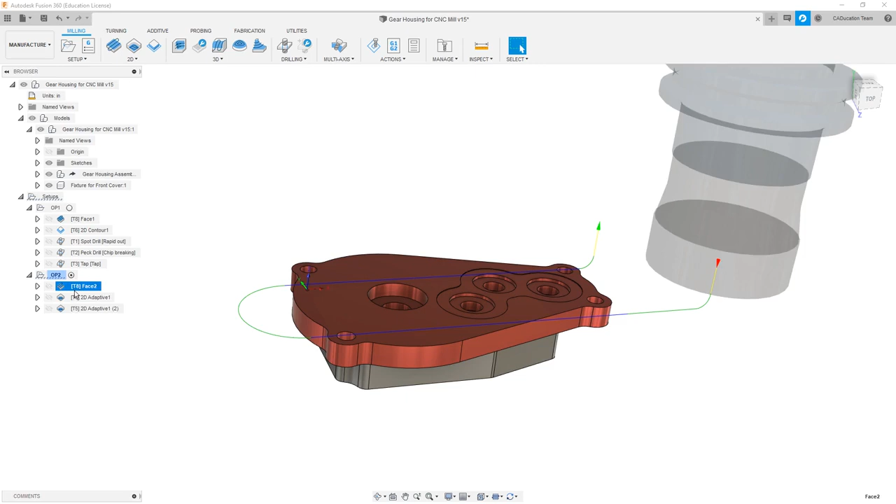This creates our facing operation, and I'm going to bring this up to the top, so we can simply hold with the left mouse button and drag it up. If it doesn't let you, you might need to drag some of the previous operations below it, because there are certain instances where it has trouble dragging all the way to the top. So just make sure that you put the facing operation first, then our 2D adaptive, which is cutting the outside of the part, and then the 2D adaptive, which is starting to remove the material on the inside of the part.

Now remember, we left stock everywhere, and right now we have a 1/4" end mill. When we're talking about creating operations, we want to keep in mind the tool that we're using, and we want to minimize those tool changes. So the first thing that I want to do is use measure, and I want to inspect the size of this bore. The diameter is 0.827, so the 1/2" bit can get in there and cut some of that geometry.

If I measure the radius on this large section here, we can see that this is also large enough for me to get that 1/2" in there. This one here is getting kind of close, but the 1/2" can still go in and cut that geometry. And the small one here, this is going to be too small to get a 1/2" tool in, but the 1/4" can go in and finish those and finish this section here. We can also take the 1/4" in to finish off these holes. Since our tool library only contains a 0.201 drill, we can pre-drill and then use a 1/4" end mill to finish off those holes.

So keeping this in mind, note that we've used our face mill, then we've used a 1/2" end mill and a 1/4" end mill. I want to carry on using the 1/2" end mill, so I'm going to create some new toolpaths and then make sure that they sit directly after this to minimize our tool changes. So we're going to select 2D contour. We're going to make sure that our tool is our 1/2" end mill, which is tool number 6.

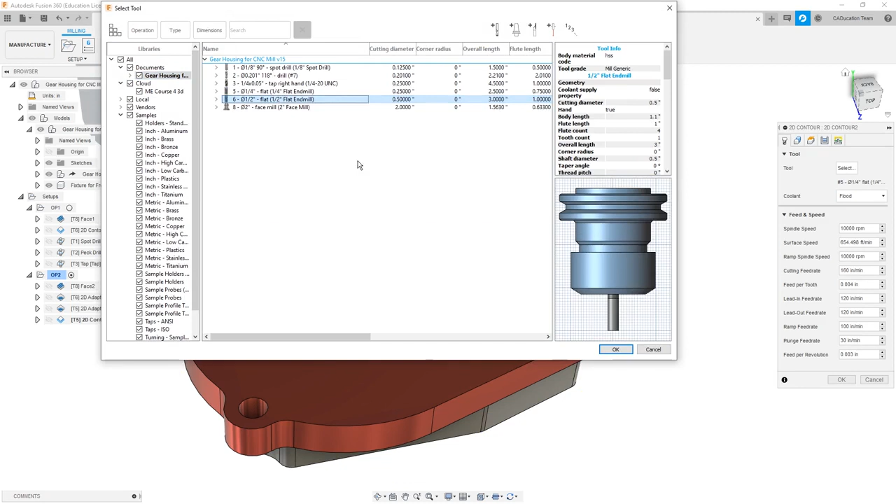And then for our geometry, I'm going to select the bottom edge here. I'm not going to leave any material behind. I want to make sure that everything gets cut all the way down to the geometry or the size that we need. For the height, I want to make sure that it goes to the selected contour, but I also want to offset it a small amount. Oftentimes, if you go directly down to that edge, you might find that you leave small remnants or the corner isn't quite sharp. So in this case, we're going to go down to -0.06.

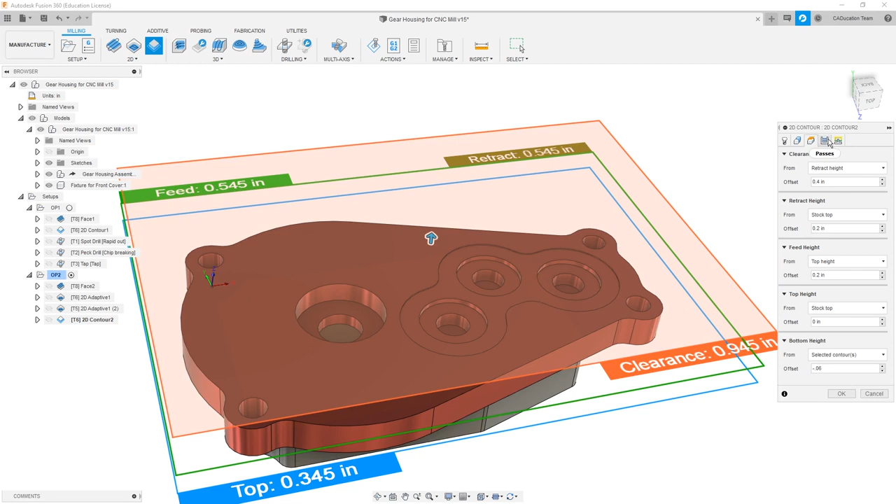For the passes, there'll be no stock to leave. We're not doing multiple depths. We can repeat the finish pass if we want, but in this case, we're going to do a single finish pass, and we're going to say OK. The last thing that we need to check is we need to make sure that our 1/2" end mill can actually cut into these areas.

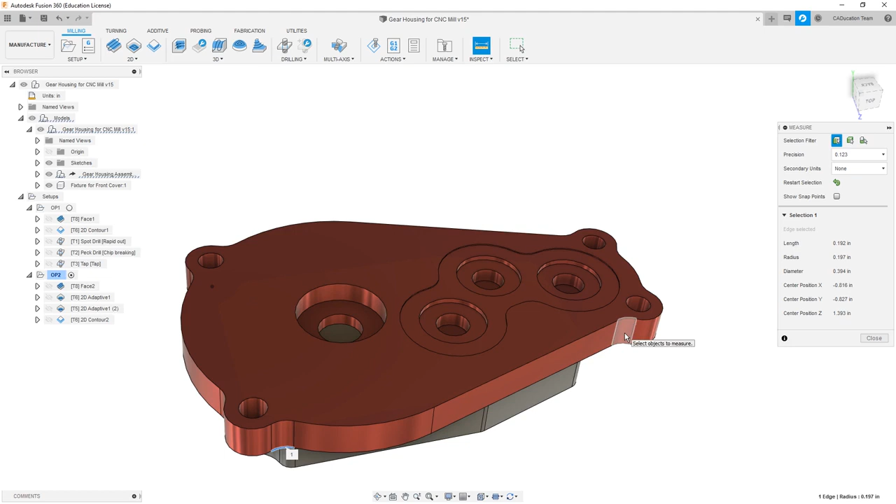You'll note that the diameter here is 0.394. This means that these corners are not getting removed. It's actually leaving material there, and unfortunately, that's not something that we want to do, because those fillets, that geometry, matches another part of the design. So I first want to drag this up, and I want to place it after that 2D adaptive to make sure that I'm minimizing my tool changes.

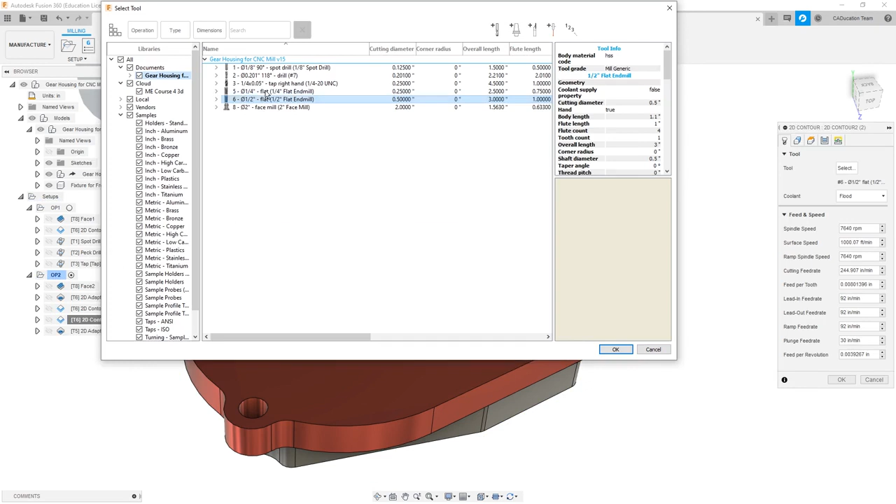The next thing that I'm going to do is I'm going to duplicate this. If I select duplicate, it automatically puts it directly after, so I don't need to worry about moving it. But now I can go in and make some modifications. I'm going to change this to use my 1/4" flat, and then in the geometry section, I'm going to use rest machining. In rest machining, I am going to say that the tool that came through here previously was a 1/2" tool.

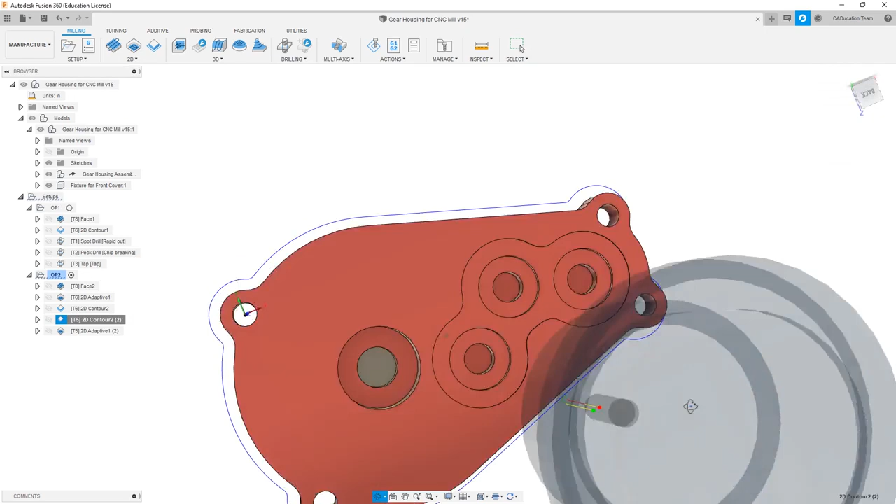All the rest of the settings will be fine. We're only looking at finish passes. We're going down to the same depth. And now we're doing that finish cut with the 1/4". But notice that the 1/4" is going around the entire model. We want it to just focus on those fillets, the areas that were left behind.

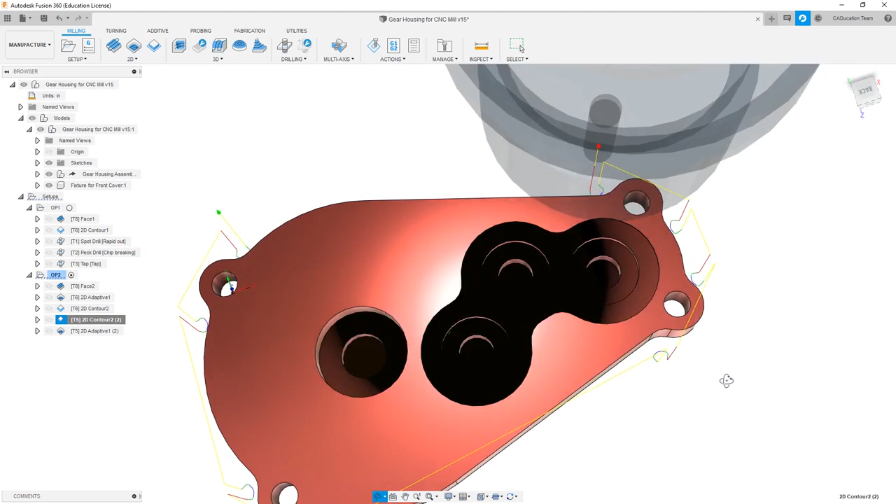If we come back in and we modify our rest machining properties, if we make this radius larger than what we're working with in terms of our tool, you'll see that it does a full contour. However, if we make it smaller, take it all the way down to 0, and let the toolpath calculate, you can see that it's coming back and it's cutting the geometry that's left behind in those corners.

So this is going to have a lot of rapid movements, but it's going to minimize the amount of time the tool spends cutting, as the 1/2" tool can cut thicker, can cut all that material and cut it a lot quicker than the 1/4" bit could.

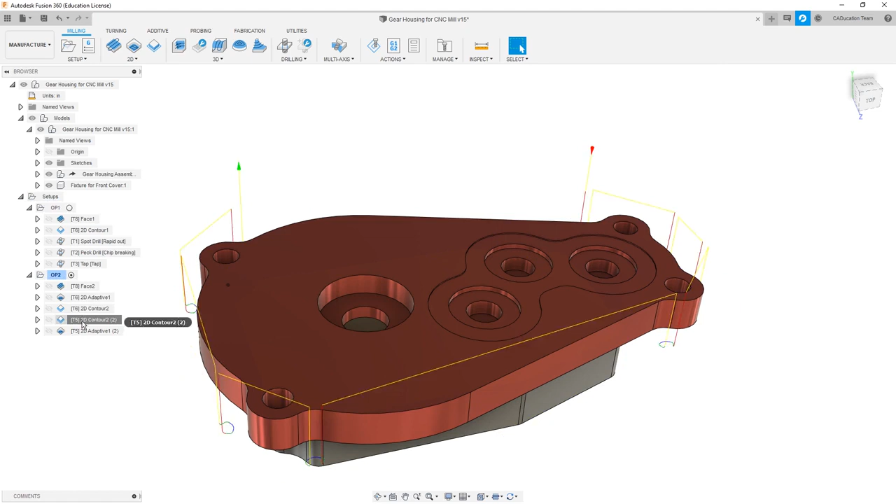Now that we have effectively gone from our 1/2" tool down to our 1/4" tool, let's move our way inward. The next thing that I want to do is take that 2D contour toolpath with the 1/4" flat, and I want to start cutting different geometry. I want to finish off this as well as this inside section here, and I'm going to focus just on these first.

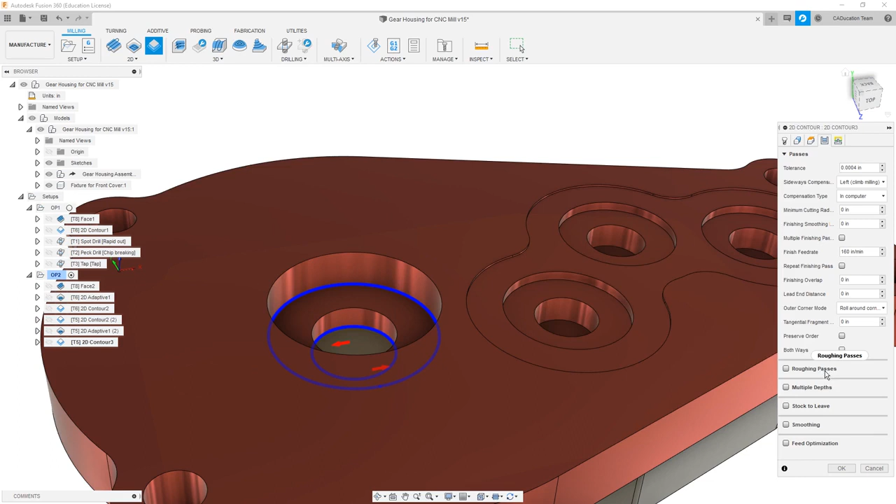The cut depth is going to be based on the contour. The passes are not going to contain any roughing passes, they're only going to be finishing passes, and the linking parameters we'll leave as default. So we're going to allow it to come in and clean those out, and then come into this bottom one and clean it out. However, the bottom one never had a tool drop into it. So simply coming in and doing a finish contour in that area isn't quite going to work.

In order to fix that, we need to come back in with a pocket toolpath or a 2D adaptive clearing toolpath. Using that same 1/4" end mill, we're going to allow it to do a 2D adaptive, leaving some material behind, but notice that it comes back and it tells us there's a warning. There's not enough material there, or there's not enough room there. If we review the warning, it tells us that it's an empty toolpath.

If we do a little bit of investigation and we measure this, we can see that the diameter is 0.413, so there's plenty of room for the tool to get in there. However, if we look at some of the linking parameters, the linking parameters may be too big to allow the tool to get into those areas. So I'm going to make them a little bit smaller. I'm going to make them 0.02, and we're going to allow it to do the helical entry.

If we come back, we can turn down the stock to leave. We can set this to 0.01, make it a little bit smaller, and see if it can actually get in there and clear that material out. It's still having problems with that, so another solution is to use a smaller tool or to keep manipulating those parameters. Using a smaller tool defeats the purpose. So the way that I want to approach this is to remove this adaptive clearing toolpath. So we're going to select it and go to delete.

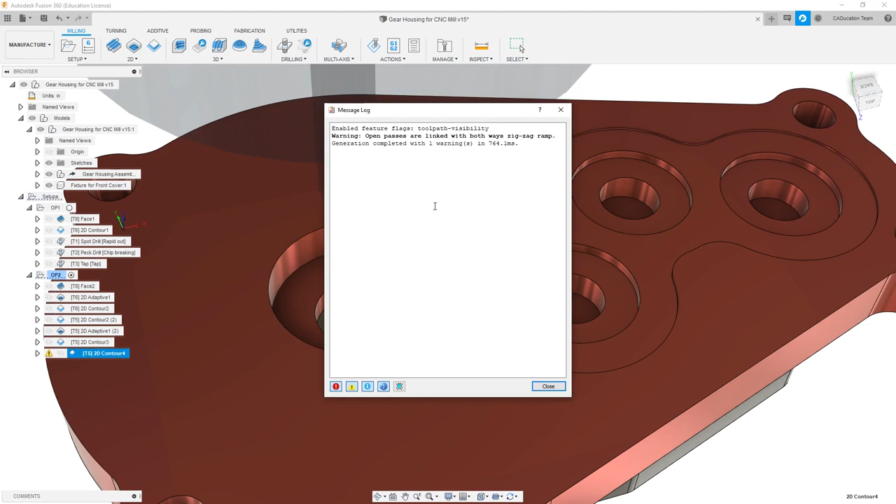It does generate, however, it is met with some warnings. It's telling us that open passes are linked both ways using a zigzag ramp. And this is simply because it doesn't have enough room to go back and forth. That's an OK solution. We can always go back in and modify the passes, and we can set the type of cutting to go both ways. We're going to select the both ways option, and we'll say OK and allow it to regenerate. Because we told it that both ways was OK, it's the same toolpath, however, it's no longer having that warning for us.

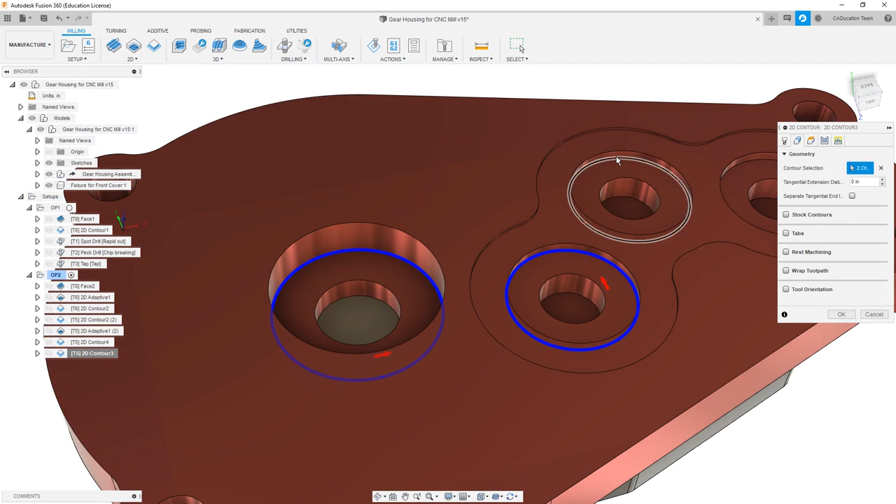We're going to make sure that we carry this up because this is also our finishing toolpath, and then we modify this 2D contour and we change our selection. We want to remove this as a selection, but we do want the tool to come back in and cut the inside of all of these areas as well. Allow it to regenerate, allow it to come back and clean all those out.

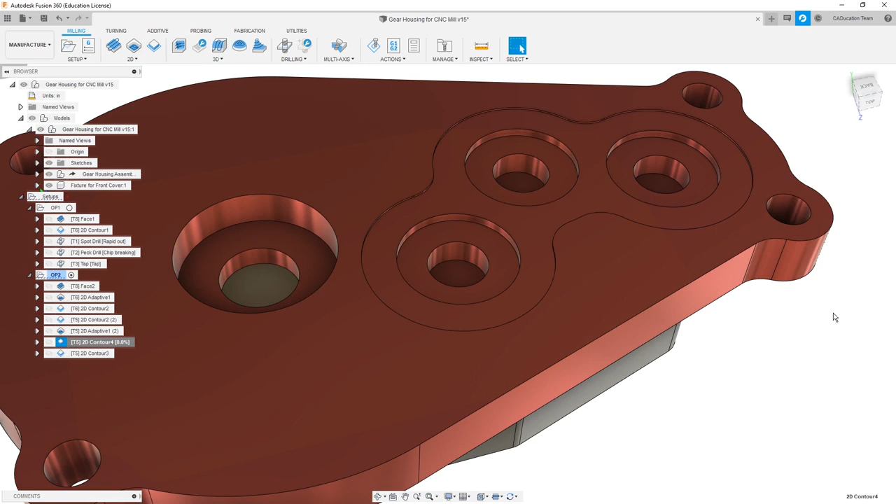I'm going to do one final operation inside of these holes, and I'm going to use the same parameters that I did for this 2D contour. I'm simply going to edit this operation, go back to my geometry, and select the inside edge of each of these. These are a little bit smaller, so oftentimes they'll produce some problems, but you can see we have that ramped entry. To minimize the amount of time spent, we can reduce the initial height of that contour, but you'll notice that this one does produce a warning. Lead out is dropped due to linking constraints, and that's okay because after the cut we can have it pull straight back out and the geometry will be okay.

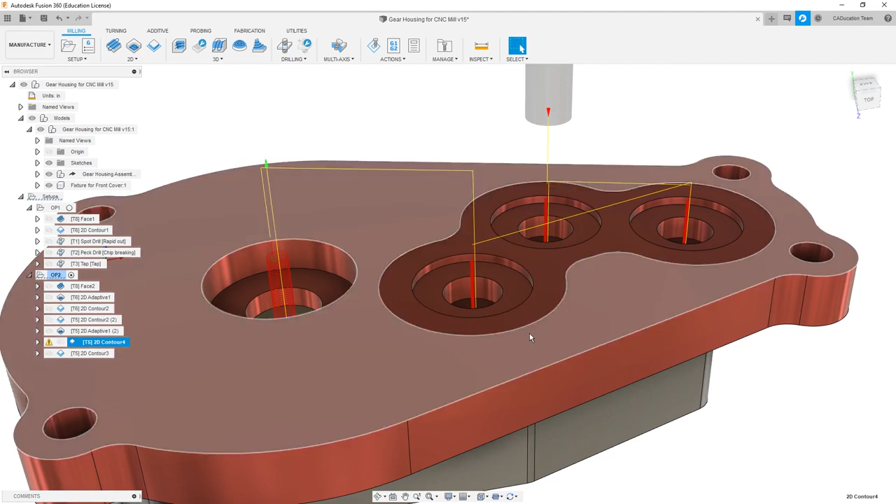Again, another option is for us to use a smaller tool. We can pre-drill this so that the tool can just plunge straight down and work its way out. There are many different options and many different ways that we can get around this geometry. The last thing that we need to do is drill and take care of these holes, but I think this is a great chance for us to save the file before we move on to our final step.